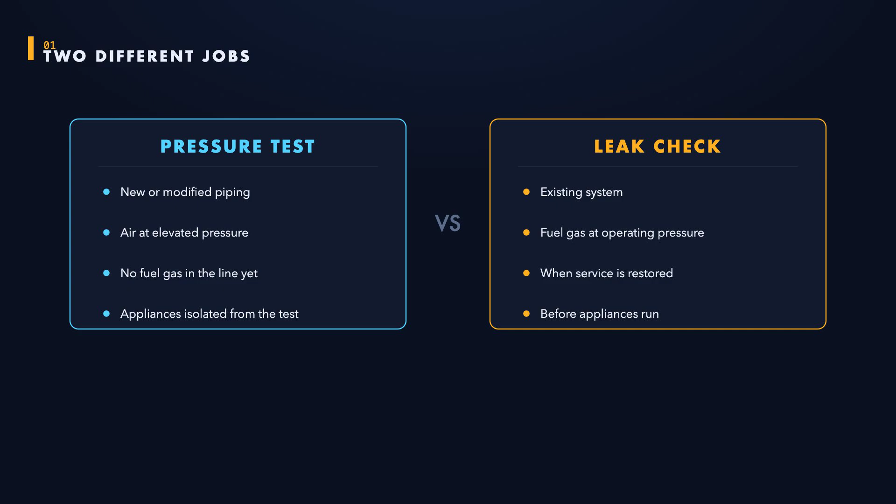A pressure test proves new or modified piping tight using air at elevated pressure before the system ever carries fuel gas, with appliances kept out of the test. A leak check happens on an existing system at operating pressure, every time gas is turned on into new piping or service is restored after an interruption. One proves the construction, the other proves it is safe to turn the gas back on right now.

For the pressure test, the medium is air, carbon dioxide, or an inert gas such as nitrogen, and never oxygen. A typical low-pressure residential system is tested at not less than 3 pounds per square inch, held for at least 10 minutes, while systems operating at higher pressure test at not less than 1 1/2 times their working pressure.

With the hold time set by the volume of the piping, not the pressure, the gauge must be able to clearly show a pressure loss, and the pressure source is isolated before the clock starts. A needle that holds steady is a pass. Any unexplained drop means a leak.

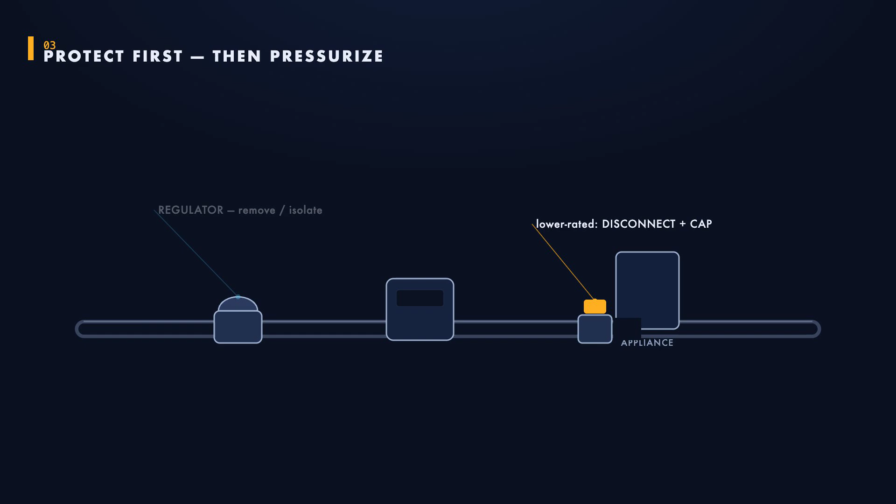Not everything on the line can survive a 3-pound test. Appliances and equipment rated below the test pressure are disconnected and the piping is capped, and regulators and meters not rated for the test are removed or isolated the same way. Equipment that is designed to take the pressure may simply be isolated by closing its shutoff valve, and a single closed valve is never trusted as the only wall between fuel gas and the test medium. Protect first, then pressurize.

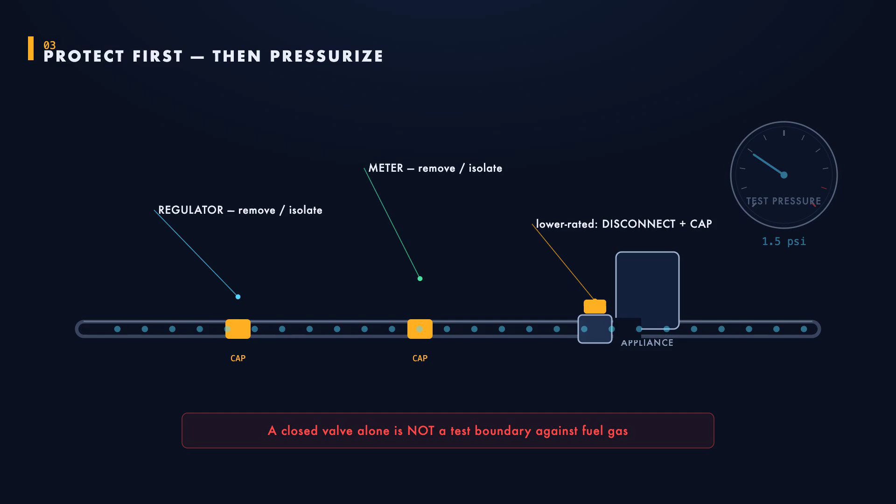If the needle falls, the leak has to be found with a listed combustible gas detector, a non-corrosive leak detection fluid, such as a soap solution, or another approved method. A flame is never used to hunt for a leak. Brush every joint and watch for bubbles that grow. Then the failed section is repaired or replaced, and the affected piping is retested until it holds.

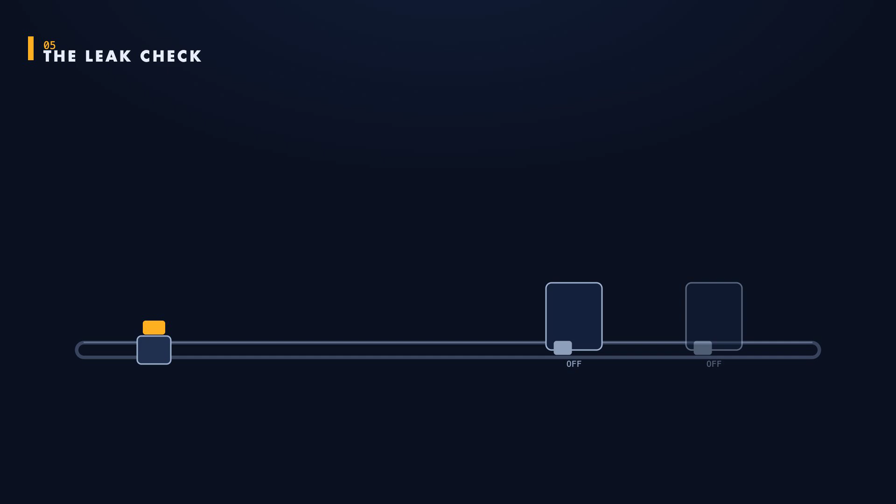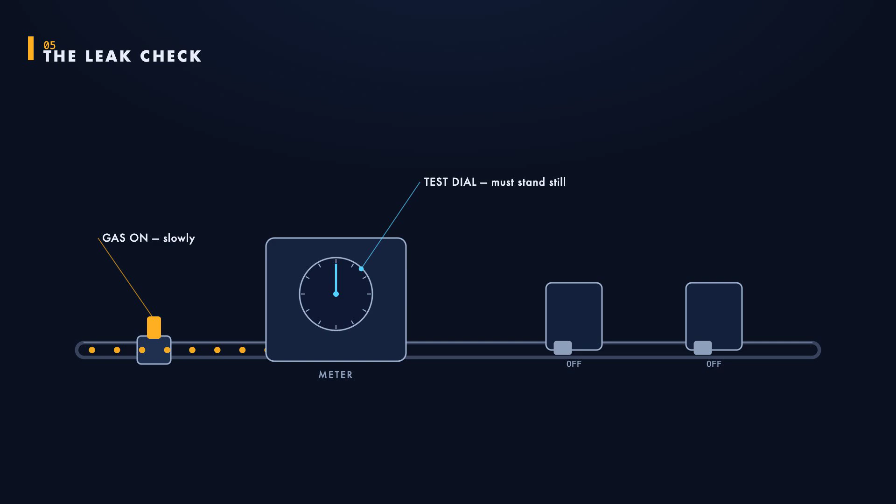Restoring service on an existing system means turning the gas on with every appliance valve closed, after confirming there are no open fittings and that unused outlets are plugged or capped. Immediately after the gas is on, the code requires a leak check before anything runs. One common method your company may specify is watching the small test dial on the meter, the proving dial from the meter episode. With everything off, that dial must stand perfectly still, because movement means gas is escaping somewhere, and the supply stays off until repairs are made.

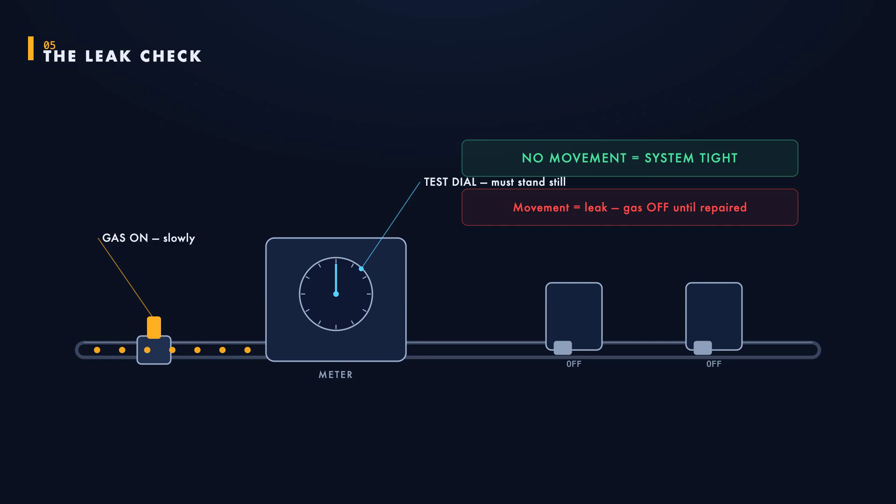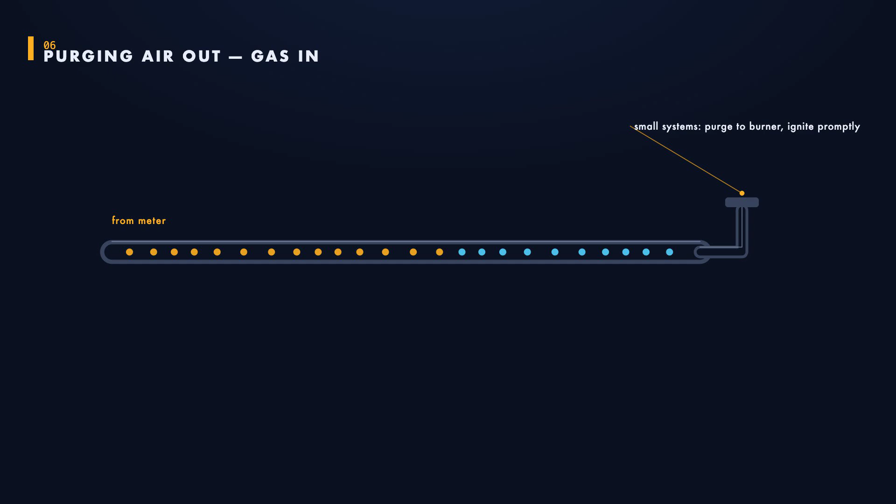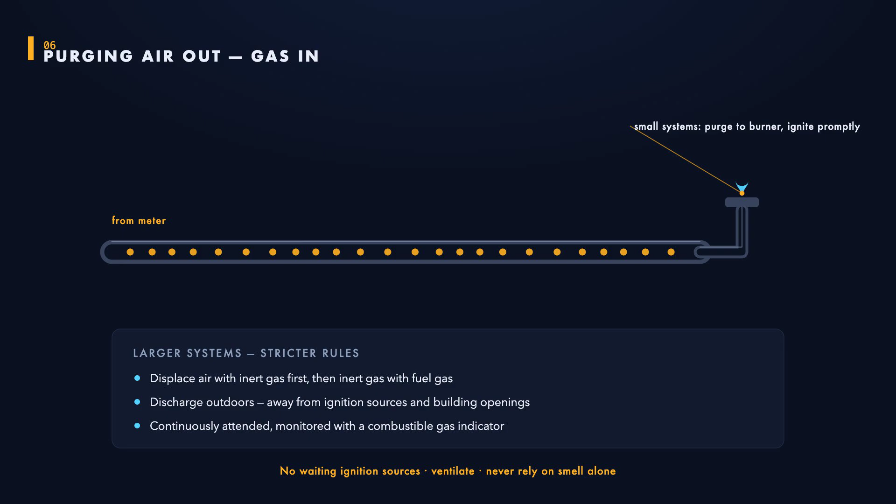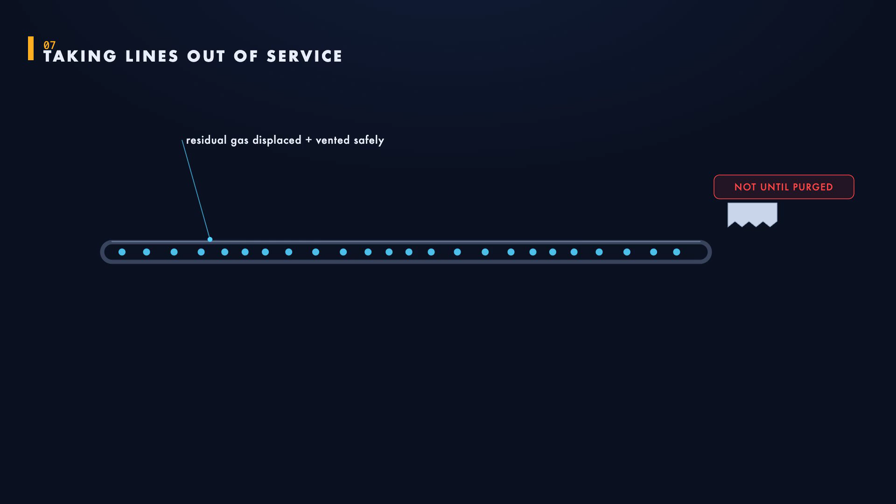Purging runs the other direction too. Before piping is cut, welded, or removed from service, the fuel gas inside must be displaced safely so it cannot mix with air near the work. The code calls for residual gas to be vented and for abandoned lines to be purged, with the exact steps coming from your company and the gas supplier. Taking a line out of service deserves the same respect as placing one in.

Before the job is signed off, the record has to stand on its own. The test pressure and duration are documented and meet the code minimums. Every joint was exposed during the test and proven tight. Appliances are reconnected, and each connection is leak checked at operating pressure. And the purge is complete, ending with a stable blue flame at the burner instead of a sputter of trapped air.

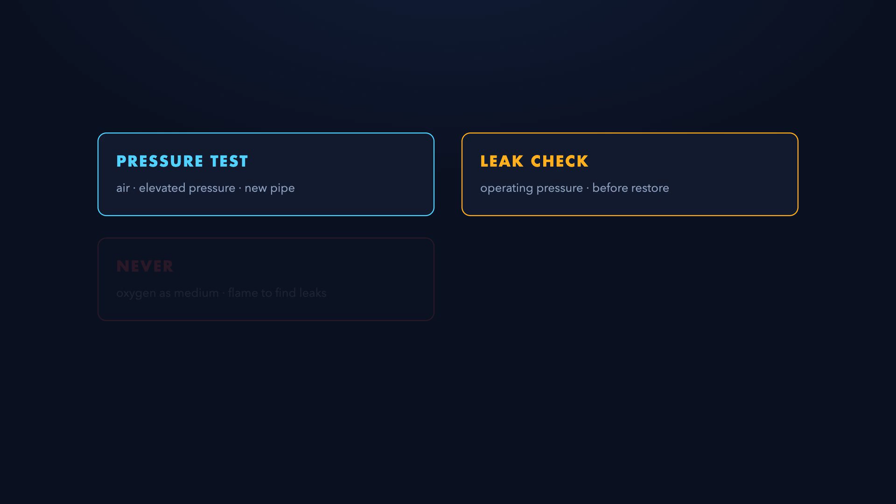Pressure test to prove new pipe. Leak check to restore service safely. Purge in to light the burner, and purge out to make the line safe for work. Next episode, corrugated stainless steel tubing and bonding.